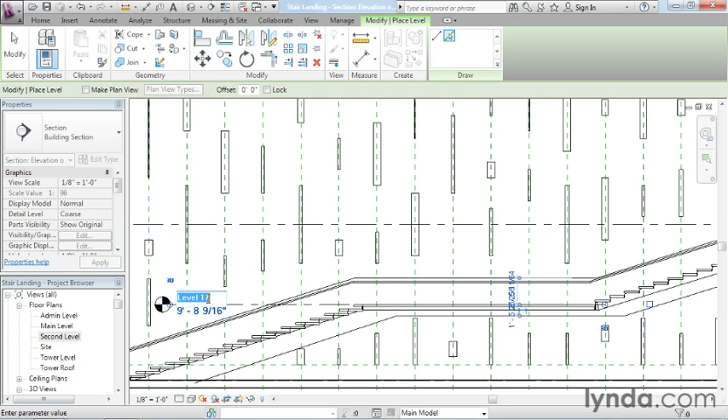So on the Home tab, I click the level button. And unless you want extra floor plans in your project browser, it's a pretty good idea to uncheck this box right here. And then I want to create that level using the Pick Lines option, and I will pick right on the top surface of the landing. And it will create a new level called level 17 in this case. I'll just click right on that level 17 and rename that to Grand Stair Landing. So that gives me the reference point to start the stairs from.

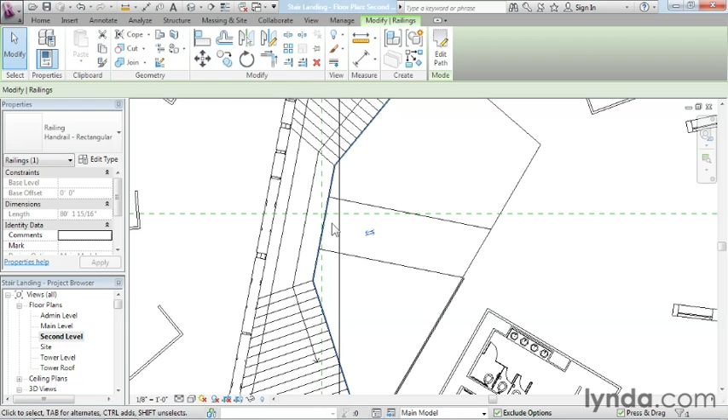Let me go back to the second level. Zoom in, and if I use my tab key right here, you'll see we've got our detail lines and we've got our railing right here. The railing is going to kind of be in the way for the moment, so what I'm going to do is just use my temporary hide isolate and hide that element. That's going to give me a clearer view of just that line right there. And actually, let's hide that line as well, because what I really want to see is the edge of the stair. There it is right there. And that way I can be sure that I'm building my new stair based on the existing stair.

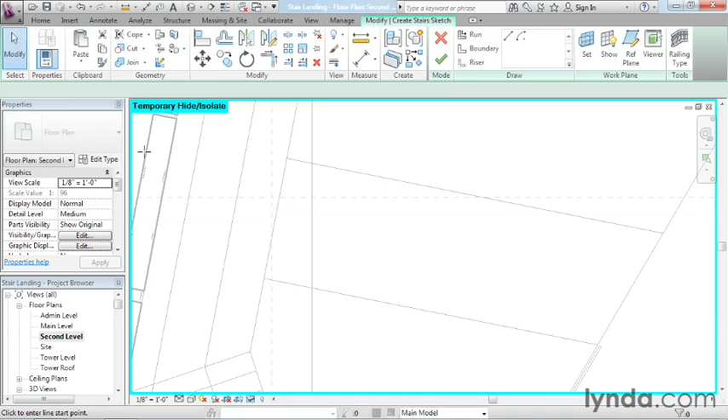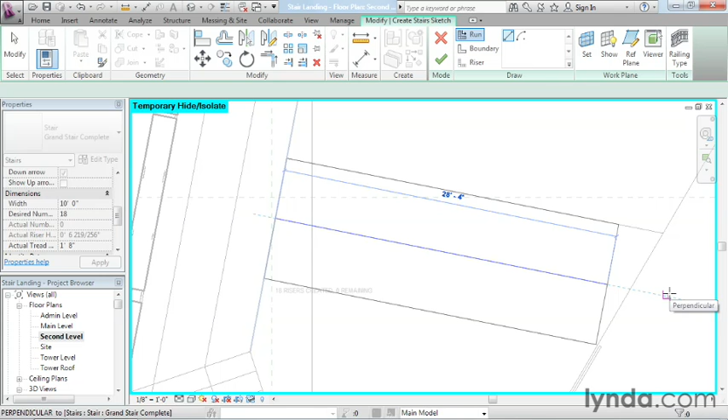So let's go to the stair command. I want to use my Grand Stair Complete stair type. It's got all the settings I need. The base level, I want to set to that new level that we just drew, Grand Stair Landing. And I want to go up to the second level. It'll do the math and figure out that I need 18 risers. And I'm going to increase the width of this run of stairs to 10 feet because that's actually how wide these two lines are right here, which means that if I can find the midpoint right there, it should fall nicely right between those lines. Let's pull that run out straight over to here and click. And that gives me almost exactly what I need.

Right here at the end, this line is the edge of the floor slab up above. And here's where my stair is ending. So I'm going to go to my Align tool, click on this line right here, and then click this, and it will take that last tread line and angle it to match that direction. When I finish the stair, it's going to complain a little bit. It's saying the slope of the railing may not be parallel, etc., etc.

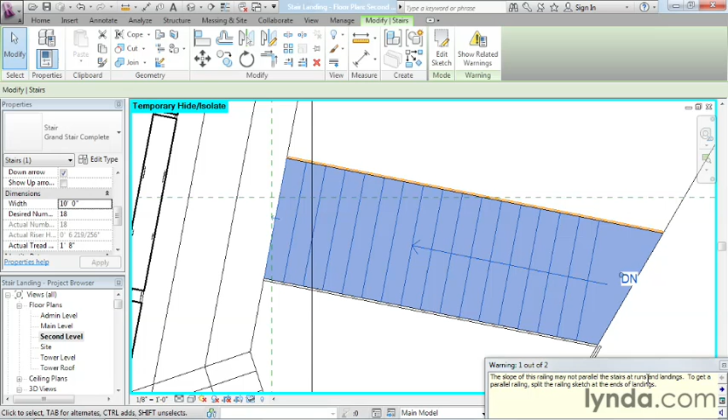I think it's easy for me to show you what the problem is by cutting a section through this stair. Let me deselect it and double click it to open it up. And let's zoom in here. And you see what's happening to the railing here, how it's kind of shooting off and continuing that same angle there. What I've actually done by angling that tread is made a really long tread, but Revit didn't have any way to calculate that, so it kind of just kept going with the same slope of the existing stair.

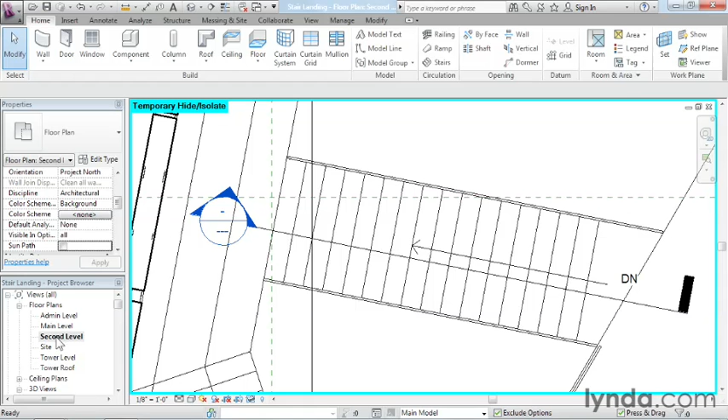What I need to do is go back to the stair, click on it, edit the sketch. If you highlight this boundary line, it's one continuous line. And so the trick here is that I want most of that line to follow the slope of the stair, but then I want just the little part at the end from my mouse pointer to the right to stay flat. To do that, I'm going to take my split tool and get it right about here and click. And that will split this into two lines.

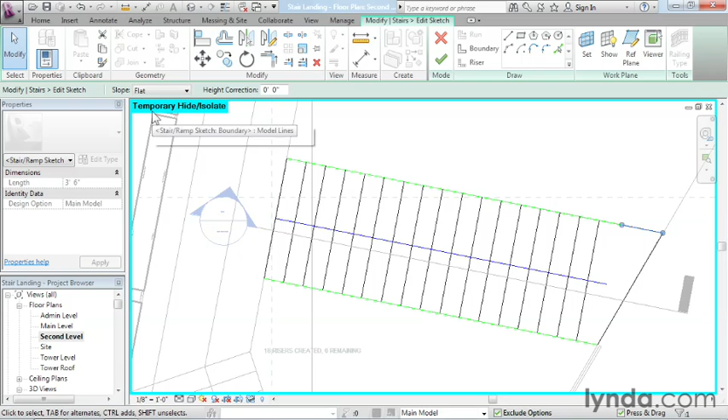Now I can click this portion, and over here, instead of the slope staying auto detect, I can make it flat. And now when I finish, that'll take care of the stair portion, but now I need to do the same thing on the railing. So I'll select it, edit the path. It's already split, but I just need to take this line and make it flat. And when I finish and open up the section, now the railing follows the slope a little bit more correctly.

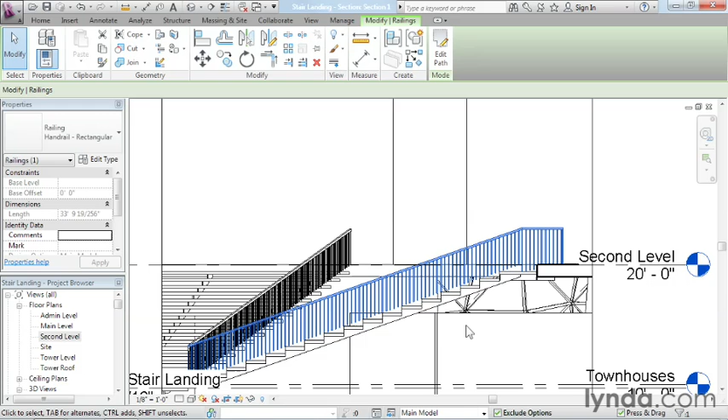We've got some strange stuff going on here, but we're not going to keep this railing anyway. In the next movie, we're going to do a railing that's a little bit more conducive to the design that we have here. So we're not going to worry so much about those balusters for right now. So why don't we go back to our 3D view, camera at the lobby, and see how our stair has shaped up. So our stair is looking really good. We've got it configured the way we want. And so our next task is to address the railings.